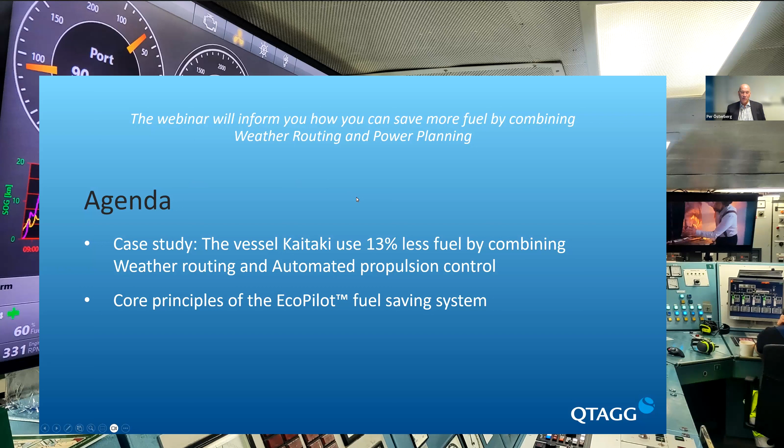So we'll take you through the agenda of today. This webinar will inform you how you can save more fuel by combining weather routing and power planning. We're going to look at a case study, the vessel Kaitaki, that by doing this is using 13% less fuel, which is quite amazing, I think. Thomas is going to take us through the core principles of EcoPilot, our fuel saving system. Then we're going to look at some implementation examples and expected return on investment. All of this will take around 20-25 minutes, and then we'll save 5 to 10 minutes for questions at the end.

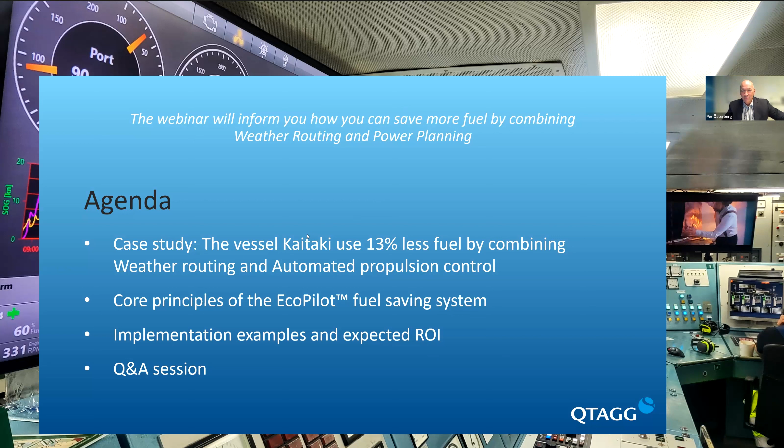Okay, so let's look at the case study for the vessel Kaitaki. We had a trial during a 3 month period for Kaitaki, going between Picton and Wellington. In total, 246 crossings during the 3 month period.

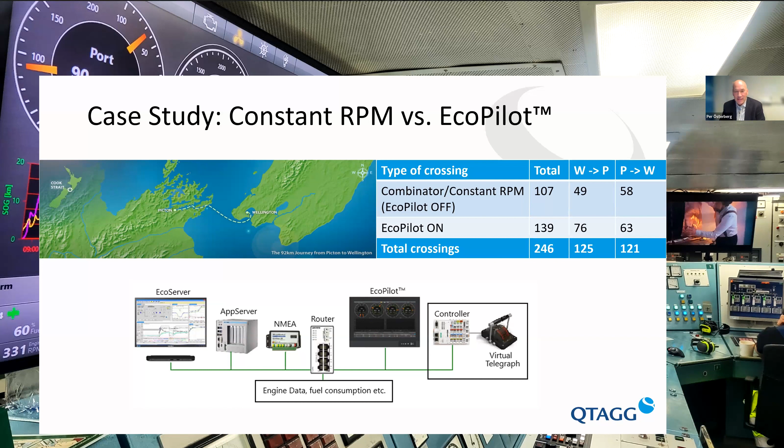And the result of this trial was quite amazing, I would say. On the crossings when EcoPilot was not activated, manual crossing, we had an average fuel consumption of 5.9 metric tons for this voyage. When EcoPilot was activated, looking at Picton to Wellington, we had an average fuel consumption of 5.2 metric tons, a total fuel saving of 11%. Looking at the other way, Wellington to Picton, we also decreased fuel consumption by 15%. So in total, using EcoPilot, we have a proven fuel saving of 13%, which is quite exceptional, I would say.

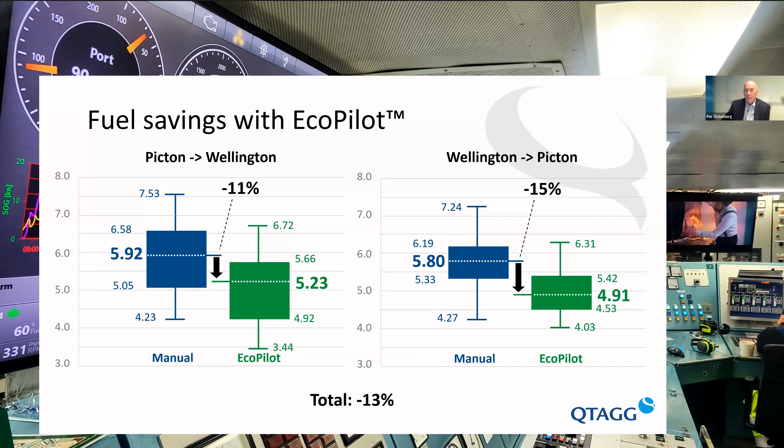So the question is, how do we do this? Tomas, I will hand over to you, you are in control of the slides.

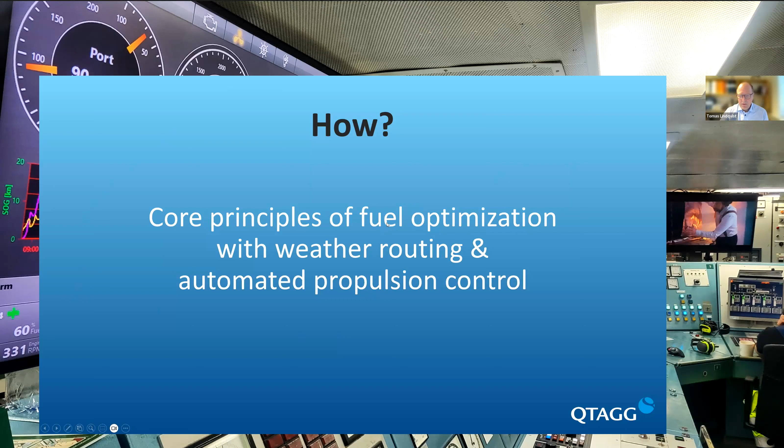Okay, thank you so much Per for the introduction. Let's see if I can scroll down. Okay. All right, so now I can control also, which is important for the control of the ships.

As a known fact, for the fuel consumption of ships, there are a number of parameters that affect it. Number one is, of course, the ship speed, so acceleration of the ship. Then you have a number of other external factors, such as the weather, sea conditions, waves, tides, currents, obviously loading conditions, the draft, the trim of the ship, propeller optimization if you have a CPP type propeller. Also the number of engines - if you have a ferry with 2 or 4 engines, you can have different setups with that. Or hull performance, as that changes over time after dry dock. And then finally, traffic situations - there are other ships you need to look out for.

So there are a number of things we can do. We can affect the speed, we can change the propeller pitch RPM ratio, and we can control the number of engines.

There are a number of other items that we can't really control: the weather, loading conditions, the cargo you want to transport, hull performance, and traffic situation. What we can do is help the captain make good decisions and work with these external conditions. One famous scientist, Niels Bohr, said prediction is very difficult, especially about the future. So even though you know all these factors and have a weather forecast, the only thing you know is that it's not going to be true.

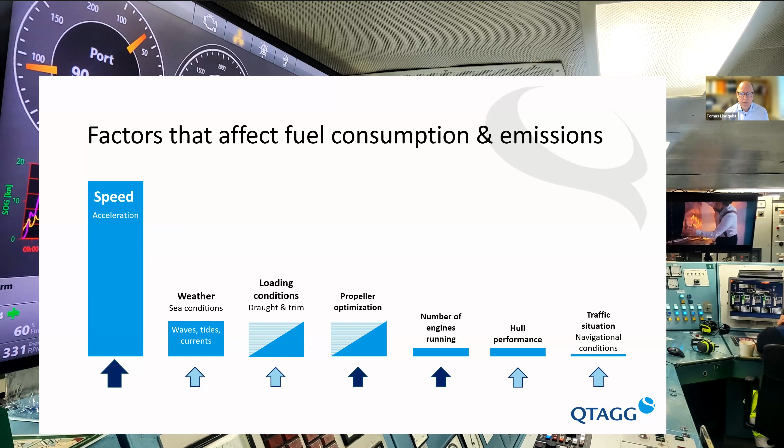So how do we handle all this? I've prepared a couple of examples of how we do this in the system.

To start with, there are two options when looking at optimization of the propulsion. One is the traditional approach, which a typical offline optimization package does, where you come up with a proposed fixed speed of the propeller. That is good, it's better than nothing.

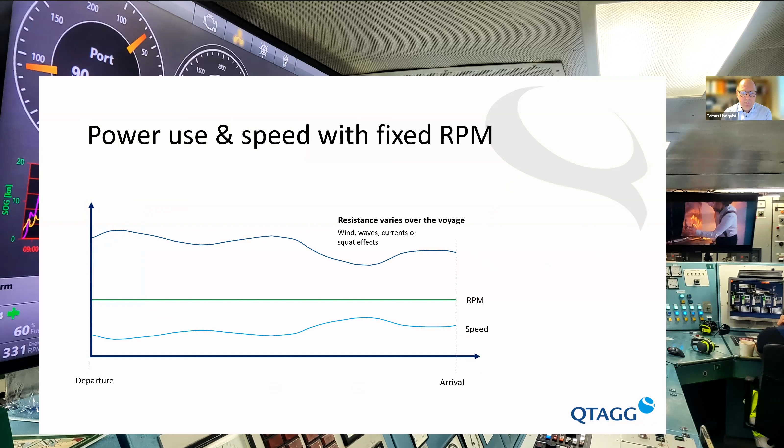The problem is that even though you keep a constant RPM, due to the effect of varied wind, waves, current, and so forth, you will have a varying required torque from the engine. That means the propulsion power will actually not be constant, it will vary. By keeping constant RPM, you need different torque from the engine, resulting in varying propulsion power.

What we do in our system is... One question there, Thomas: couldn't it be under some conditions where fixed RPM is really the best way? Absolutely, that would be the sunny, nice, sailor's delight days, where there are no external factors really affecting the ship - no wind, no waves, no current. Then this could be the optimized way of sailing.

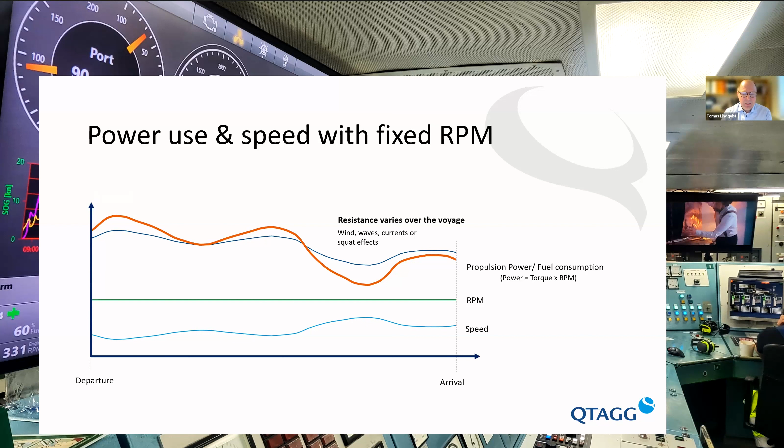Exactly, so we're all looking for those days. What we do then is look at how we can go with a fixed power instead, even though external factors are changing. That means we always keep track of torque and RPM to maintain a constant propulsion power. That is the most efficient way to take a ship from point A to point B.

So one example: the RPM will actually vary over the voyage automatically by our system. Ship speed will also vary a little bit due to external factors, but this is the most optimum way to take the ship from point A to point B.

This is really interesting, and as you say, you can try this on your car. If you put your cruise control on a fixed speed, that's a fixed RPM, and you can actually hear the engine working more when you go uphill. Compared to when I've been doing this test going to the office manually instead - going a little slower uphill and a little faster downhill - to my surprise, the fuel consumption difference was almost 20%. So it's clear that fixed RPM is not the optimum way to go if the resistance is changing over time.

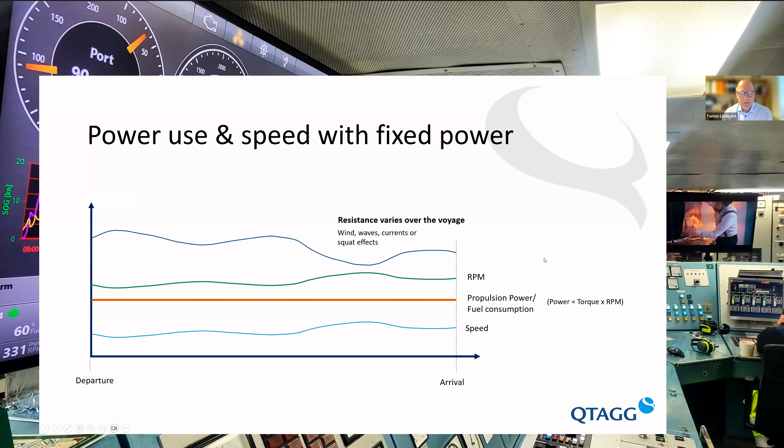So everybody can try that today when they go home. The mission for our system is to find the lowest possible propulsion power while still meeting the requirements and arriving the ship on time with the given parameters for your voyage.

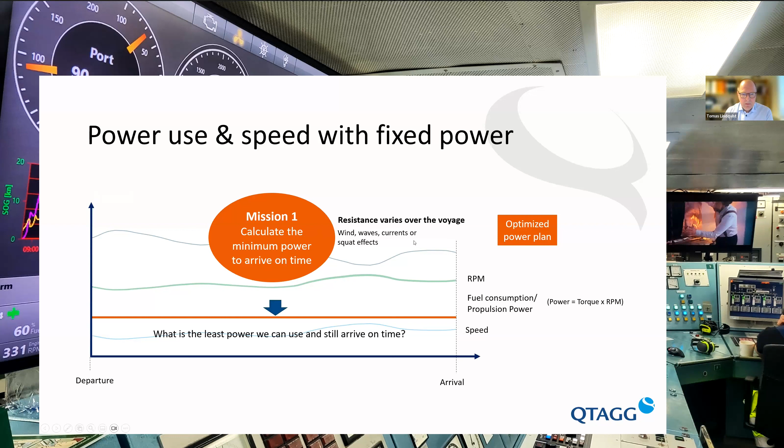Thank you, Tomas. Let me take us through a bit how the system works and the different goals you can have in the system. You can have arrival time or CII value - there are some other modes you can choose between. And of course, we have to bring data into the system: the planned route and the weather forecast. Again, a forecast is just a forecast.

We only know that the forecast will not happen exactly as predicted - the outcome will differ. That's why it's also important for us to bring in constant ship data and engine data and adjust to the real situation on the vessel. So it's important to know this is not an advisory system that tells you what to do - this system is in control. We are controlling this and making adjustments in real time to really make sure we're using minimum power for the route.

So we have the optimized power plan calculated, a high resolution power plan, and the system is controlling everything. And then there are other ways to optimize. If you have a pitch propeller, you can have the combination between the perfect RPM and the pitch of the propeller.

This high resolution power plan, you can't really let a captain make this small adjustment that our system is doing. He would have to have his hand on the telegraph system all the time. So you can't really compete with a machine in this case.

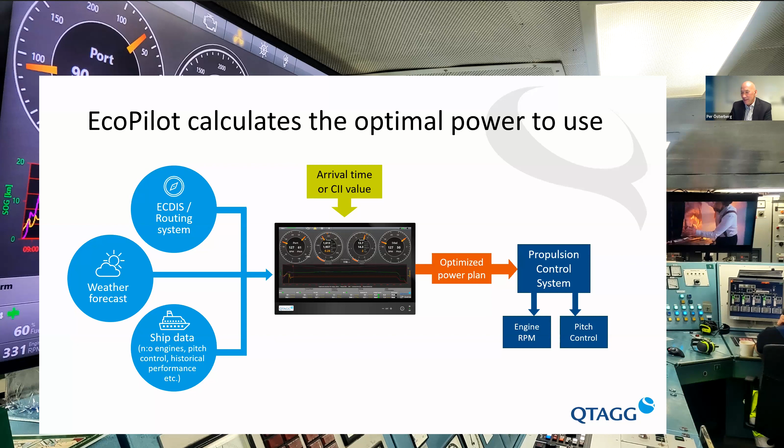So our system is executing the perfect and calculated power plan through this engine control. And Thomas, I let you give an example of a voyage. Yes, so we prepared an example of a voyage.

It's sailing from Yalova outside Istanbul to Sète outside Montpellier in France. In this prepared example, there are two alternatives. One is the shortest route, through the Messina Sound and then between Sardinia and Corsica. And then we have the west route going south of Sicily and south of Sardinia.

Based on the ship model that we have and based on the weather forecast, the wind, the sea currents, sea depth and so forth, we calculate the estimated fuel consumption for the full voyage: 183 tons for the shortest route and 212 tons for the western route.

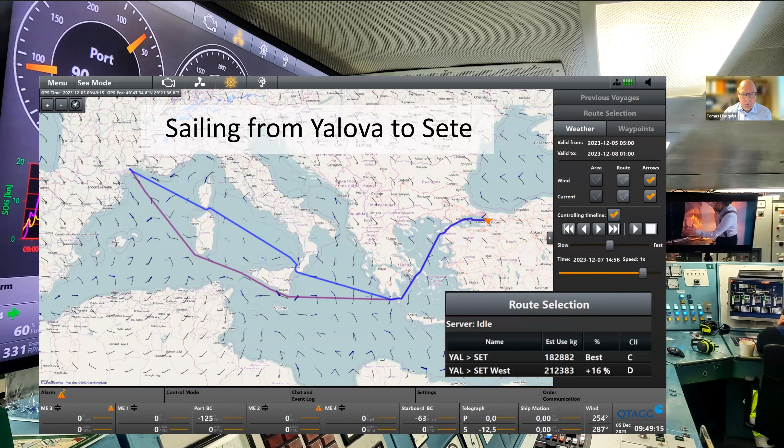We also see that by taking the normal route, we get a C rating. And if we take the other route, we will have a D rating. So obviously the captain will take the C rating route to comply with the new regulations and save fuel for the company. But as you know, things will change.

So the first thing that happens is that there is a queue in the Dardanelles Strait. Now we have a planned arrival time at the entrance at 4:02, and a planned sailing speed of 19.7 knots in the Marmara Sea.

But as there is a queue, we get delayed 15 minutes, so we have a slot at 4:20. Immediately the ship speed will be reduced roughly 1 knot, and that of course saves fuel for that passage.

But then for the remainder of the voyage, after coming out of the Dardanelles Strait, we'll have to increase the speed. But that's a much longer stretch, so the speed increase is actually quite small.

So this is one practical way how the system helps the captain to always go as slow as possible, or with the minimum propulsion power needed.

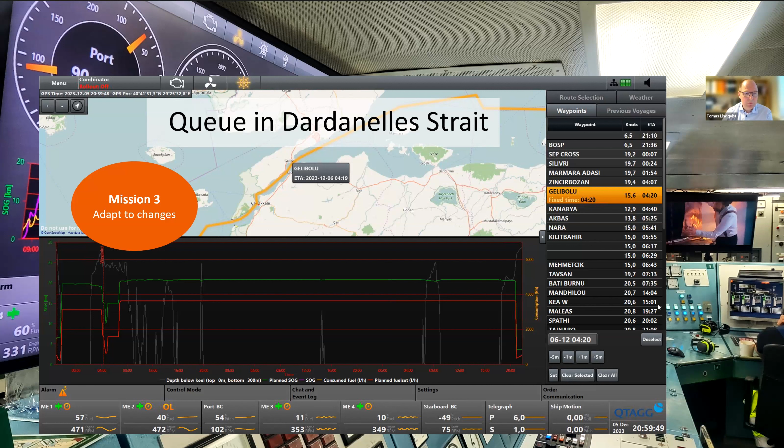So here you see there is a speed restriction in the Dardanelles Strait, and the passage here is very slow, 12 knots. All those things are taken into consideration in the power plan, to help control and reduce the speed during that passage to avoid penalties.

So the next thing that happens: pilots are on strike in Messina Sound. Not good, because that means we have to take the longer, more expensive route. And remember, that's the D rating route.

So what do we do then? You have to take a decision: it's okay, we can go with the D and keep the arrival time at 2300. Or you can take a management decision and say, no, we're going to delay the arrival by 3 hours and keep our C rating.

That's a practical way how we can help shipping companies take conscious decisions, whether we stay on C or accept D, rather than it just happening. So this is a practical example of how the system helps by keeping an optimum plan at all times and implementing that automatically. All right, Per, over to you.

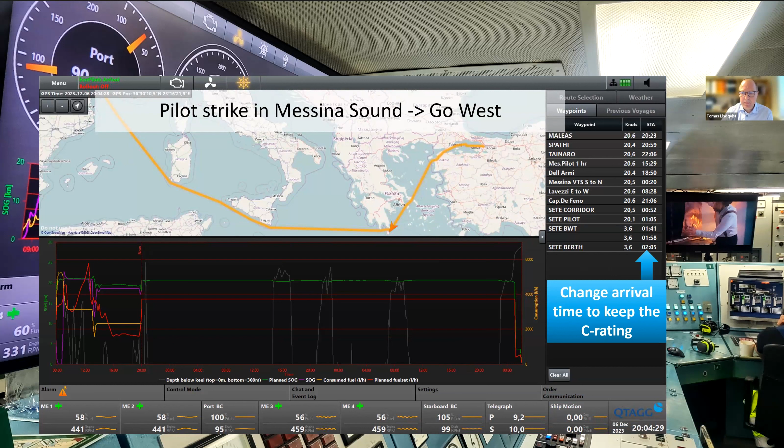Nice, Tomas. So the system is really executing what you would like to do. Yes, that's the idea. Captain's best friend.

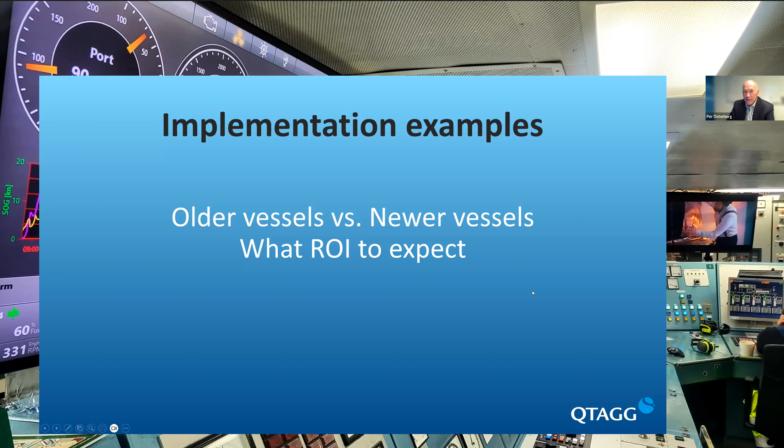Okay, I'm going to take us through some implementation examples. We'll have a look at an older vessel compared to a newer vessel, and what return on investment you can expect from doing that. So this is a little bit older lady. Kaitaki was built in 1995.

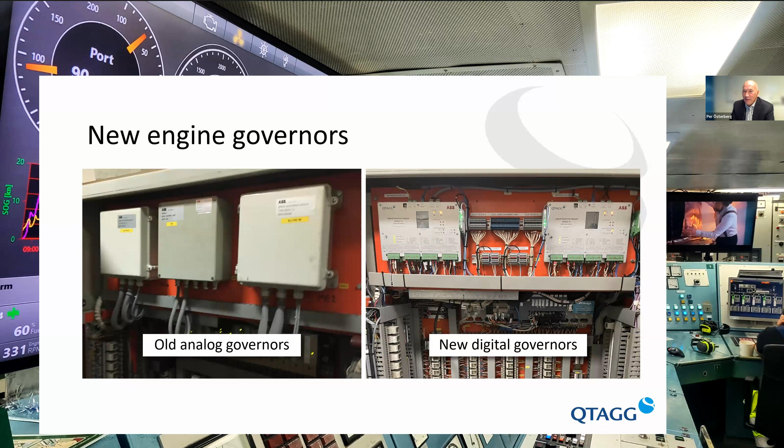We did a little bit more than just implementing our system. We also exchanged the analog governors with our digital governors. We've been the provider of governors to ABB for many years, so on several hundred ships out there, it's actually our governors. We also replaced the actuators, and we are also a manufacturer of actuators.

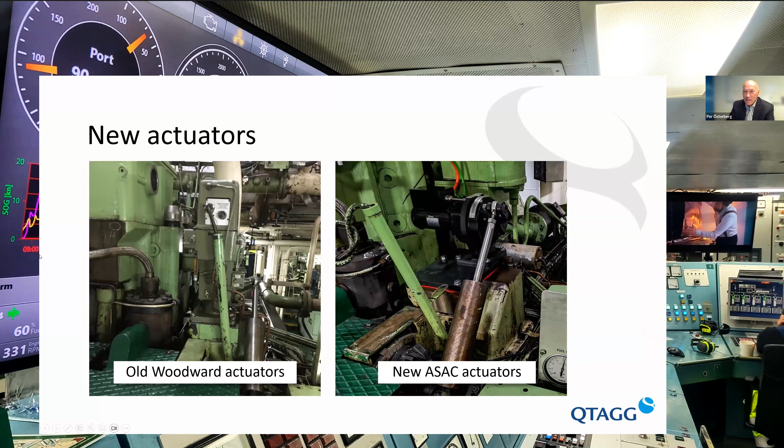Both ABB and Wärtsilä are actually using our actuators, so if you are doing retrofits of governors and actuators using ABB or Wärtsilä, it will be our equipment that gets installed. We changed the panels, so even though it was a complete retrofit, it was a cost of 370,000 euros.

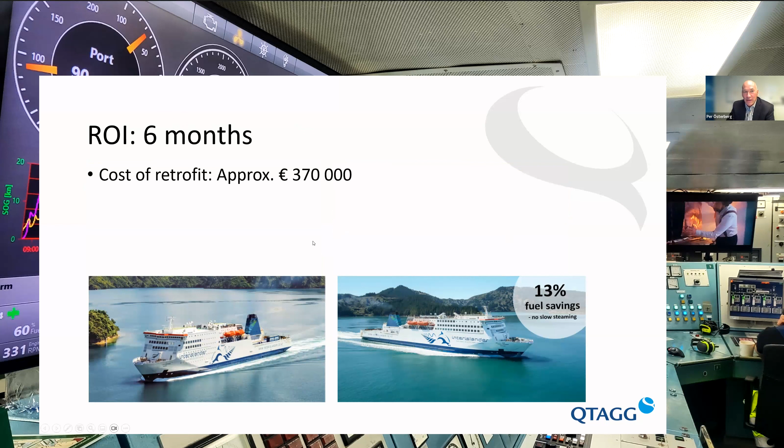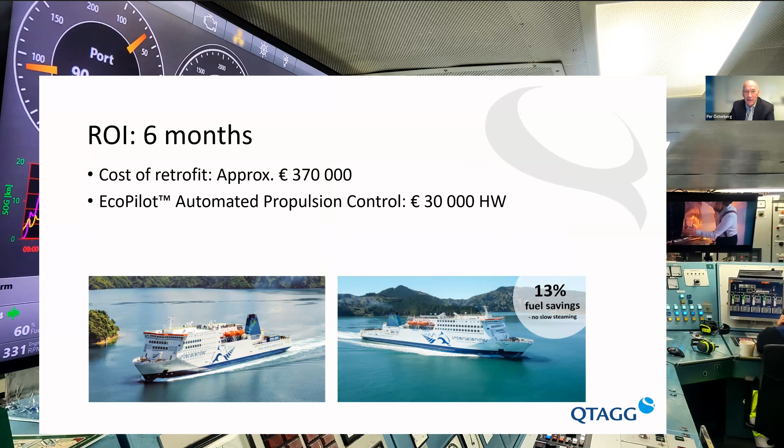Thanks to taking an additional investment in our fuel saving system—because if they didn't do this, it would have been sunk cost—they also installed EcoPilot, and fuel savings with EcoPilot are around 750,000 euro per year. There is also a software license cost, since we need to make money in the long run developing our software. It's a percentage of achieved fuel savings with an upper cap, unfortunately. Otherwise it would look even better on this vessel.

So how does it look on a newer vessel? What do we do there? If we look at a vessel built in 2019, it's enough to provide the parts of the system where we bring in the NMEA signal. We integrate with the bridge control system, using our controller to communicate with the existing system.

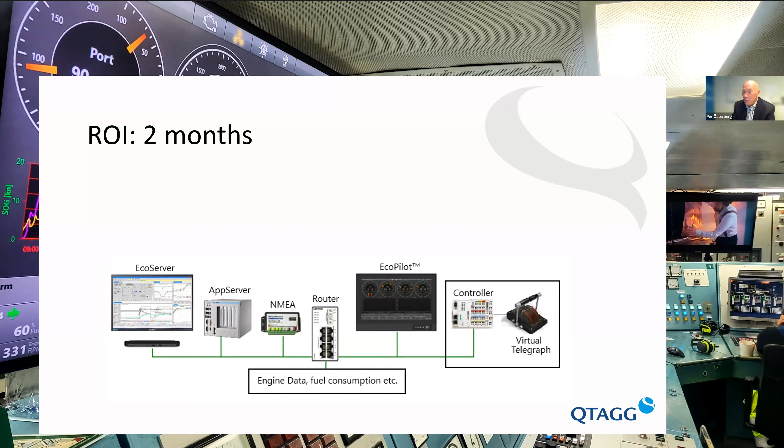This system doesn't take several weeks to install—it takes about two days to install on the bridge. Return of investment is usually around 2 months with this, and you can expect fuel savings of around 200,000 per year if it's a fixed propeller.

So that is the minimum we can see, around 3 to 4%. Normal fuel savings, I would say, if you have a pitch propeller, is between 6 to 8%. What we did with Kaitaki, 13%, is very much due to the extreme conditions they're having—a lot of current, a lot of changing conditions all the time—and we can just see that EcoPilot is much superior to a human being during those kinds of conditions.

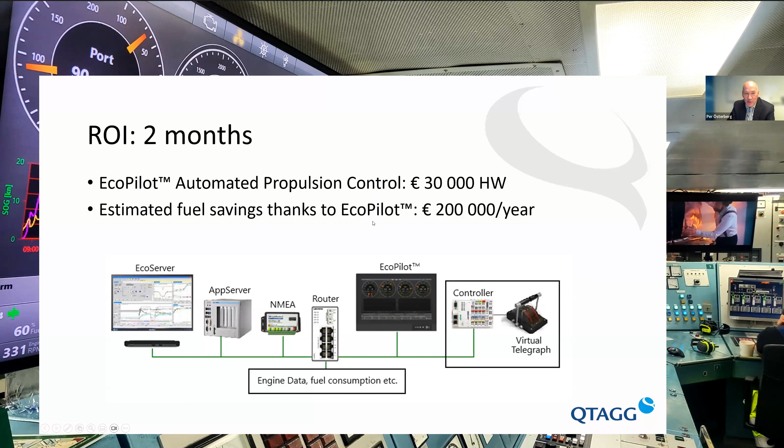So I think we've spent our 25 minutes, so there are questions and answers coming in. Sure, we have a few questions.

Let's see, the examples used passenger ships. Is this a solution for Ro-Pax and Ro-Ro only? Thomas, what do you say? How many different vessels have we installed this on?

Yes, we have installed it on bulk carriers and tankers as well. Obviously there's a benefit with Ro-Pax ships in that they're going on the same trade all the time, which makes it very easy to verify the savings because you can compare so many voyages. But the installation, the technology, and all of that work exactly the same on longer routes, like the one I showed—it's not a long route, it's 3 days from Istanbul to France—but still it works for all types of ships. So it's a very versatile solution in that way.

Another question: is retrofitting possible? And if yes, what's the need for the virtual telegraph?